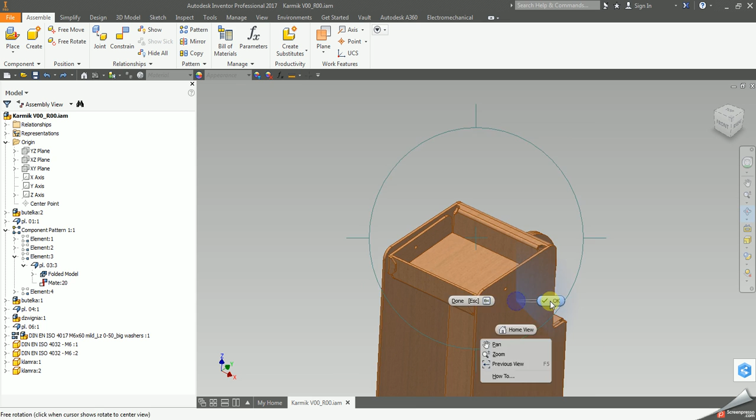Hi, it is me again, struggling with flexibility once again, and now I have made a few dozen tries to see what is working and what is not working, and generally it turned out nothing is working. And now I will make a presentation for you of how flexibility is not working in Inventor.

So we will try to place a pre-assembled bolt assembly here, and the bolt assembly is prepared as flexible so it can accommodate various thicknesses for the clamping or holding distance. So this is basically just an assembly of something that I am developing, and I will show you the bolt

assemblies. I have prepared 3 different types of the same bolt assembly according to various suggestions that arose during months or years of struggling with the flexibility issue in Inventor. So we have basically three sets of the bolt assembly. We have generally the same assembly, only it is built in a different way.

One is constrained to the origin planes and basically the origin coordinate system in its assembly. The other one is done so all components are free and are only constrained to each other, and the third one is built upon the first component being grounded at some point. It is the middle, the center of the assembly.

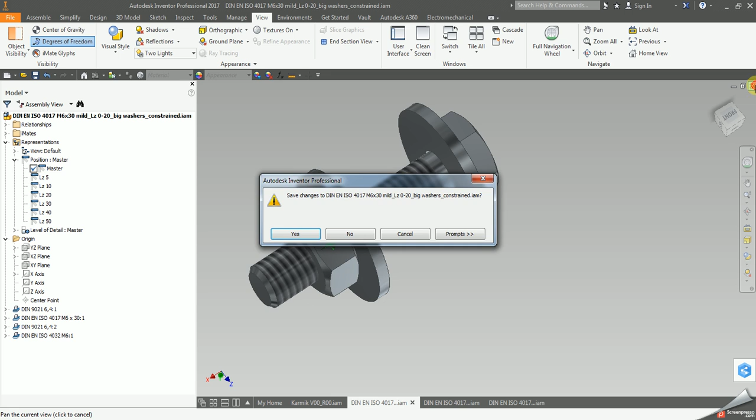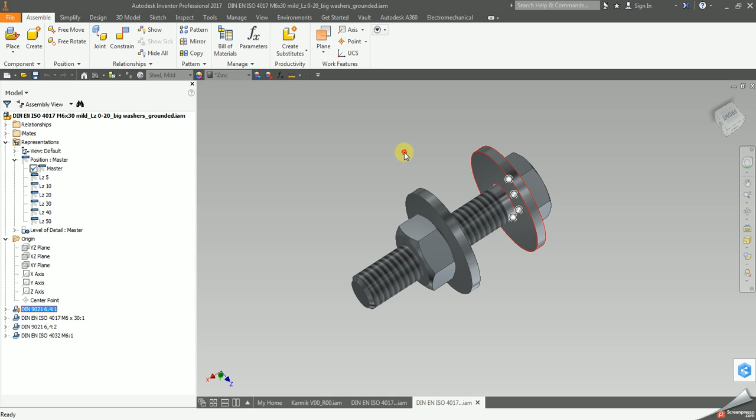The other assembly that we have is the assembly that is named as grounded, and basically this washer, instead of being constrained to the origin planes and the origin axis, is just grounded, because there was a suggestion sometime in the past that grounding the first component hugely increases the stability of calculating and solving the assembly.

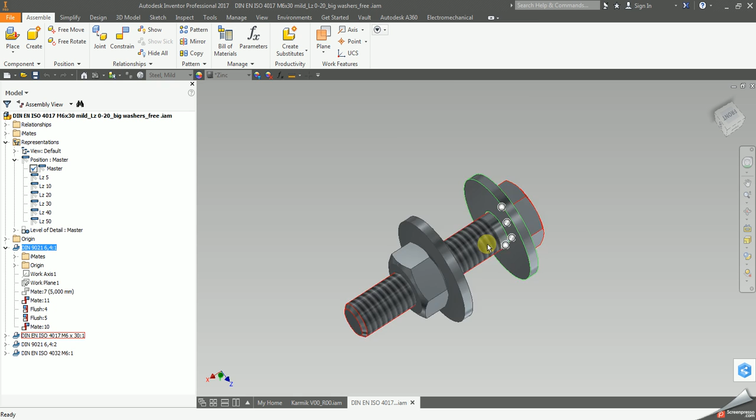And the third assembly is basically the same as the grounded one, only that this washer is ungrounded, so it is free to move, and basically all the components can move freely inside the assembly, and they are constrained to each other only. So now I will place all those 3 in turn in this assembly, and I will show you how Inventor is crashing the assembly in every possible case.

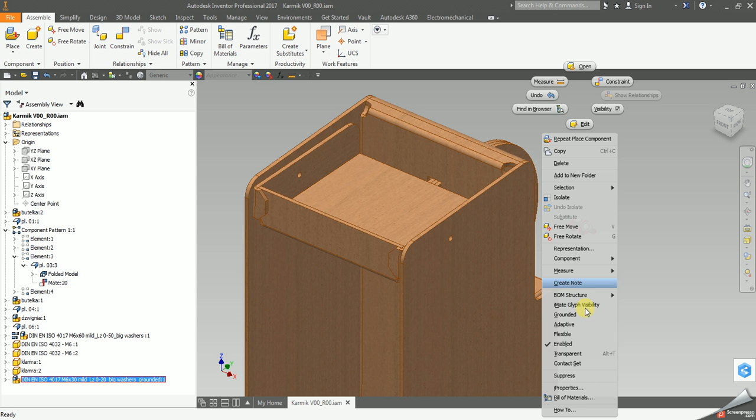So we shall start with the grounded, the most common one. I will place it here, and now I will make it flexible, and I will now constrain the axis of the bolt to the axis of the hole that I want the bolt to be in. So far so good.

Now the thing is, in this case, I want the bolt head and the washer under the bolt head, so the bolt head is outside. So I want to constrain the face of the washer to the face of the wall of this element. I will try to apply this constraint then.

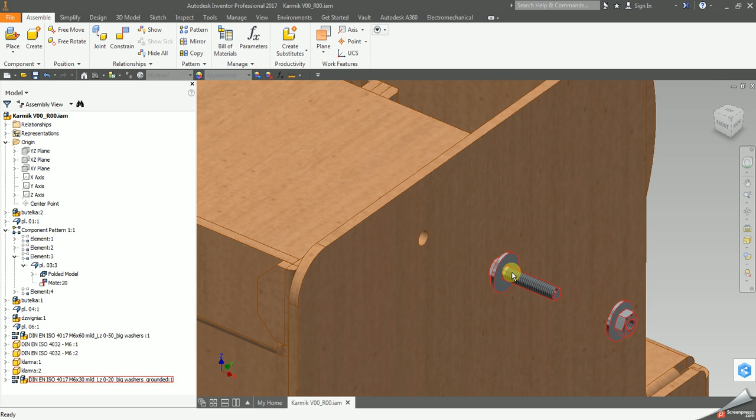This is fully doable, as this bolt can be in the other way, so it will fit. There is nothing that would prevent this bolt from fitting in the hole in this direction that I want. So I will try to apply the constraint.

It doesn't look very good because the bolt has now moved there for some unknown reason, but okay, I am giving it a shot, and basically we have a problem because the constraint solver did something that Design Doctor doesn't accept.

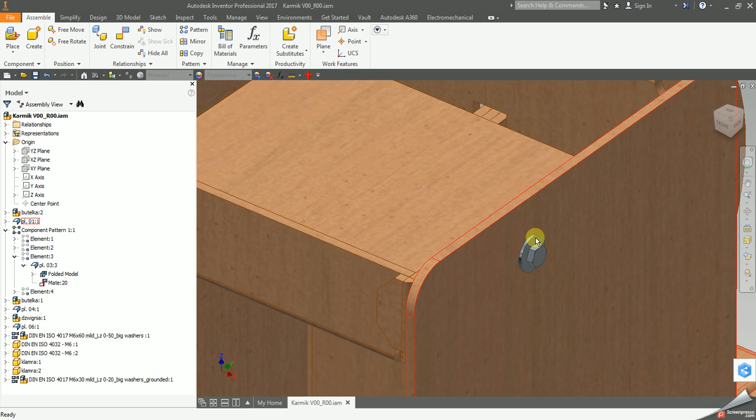Although the bolt looks fine and basically it is now here, we have an error. This error comes from some inconsistency in the way that the assembly is solved and the solution is evaluated. So there is some bug in the software that is preventing Inventor from solving this properly.

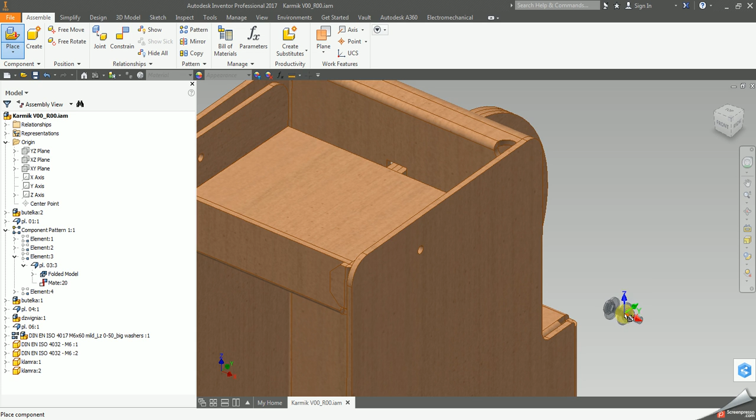We shall now try the same with the assembly that is not grounded but free. Johnson advised me to do the following: to unground the components inside the assembly, then to ground the assembly itself, and then to make it flexible. This way, these components can only move inside their parent assembly that is grounded.

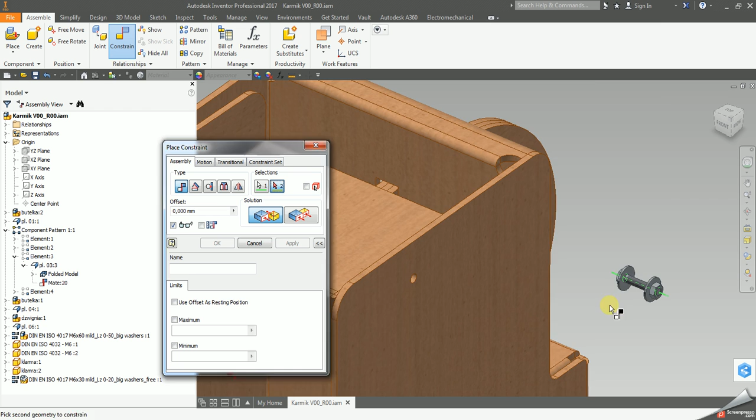I personally do not think this is the right solution because it prevents many solutions, and in many cases this cannot be used, but nevertheless I will try. So I will do the same. First I will constrain the axis of the bolt to the axis of the hole that I want the bolt in. So far so good.

Like previously, the bolt is aligned with the hole, and now we do the same. We try to mate the face of the wall with the face of the washer. The outcome now is very different from what it was before. As you can roll back in the video, once I selected the two faces for the mate constraint in case of the grounded bolt assembly, the bolt was immediately placed there for some unknown reason.

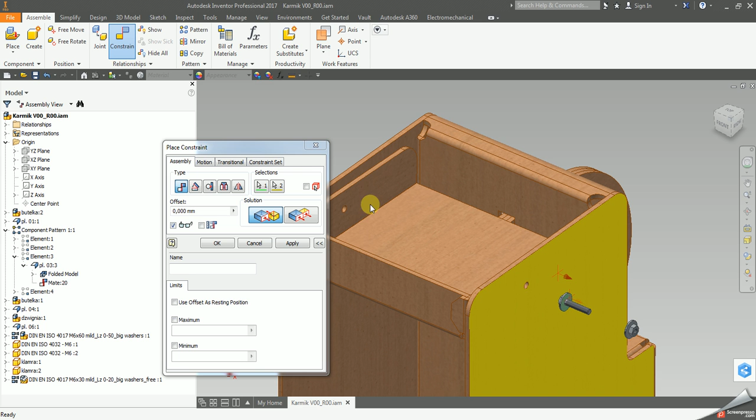Now it is here, and we get an error again. This time the bolt is nowhere near where it should be. We have an error, and basically the assembly is not usable anymore. In case you might say, oh, it is not a problem, just take the bolt.

No. In case of more complex assemblies where there are more flexible components, the assembly is forced into positions against its internal constraints, and it is no longer possible to rebuild the assembly properly. So it is lost. You need to delete all flexible components, and you need to rebuild the assembly from scratch. So this is not the point.

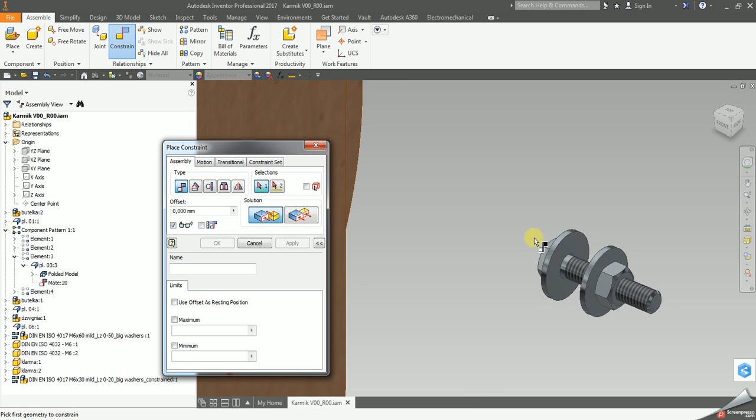So again, generally we have now the free flexible subassembly that also didn't work. We can try another thing, to place a constrained subassembly. So if I place the constrained flexible subassembly, I just make it flexible as any other component, and then again I will apply the mate constraint to the axis of the hole and the bolt, and then I will apply the mate constraint.

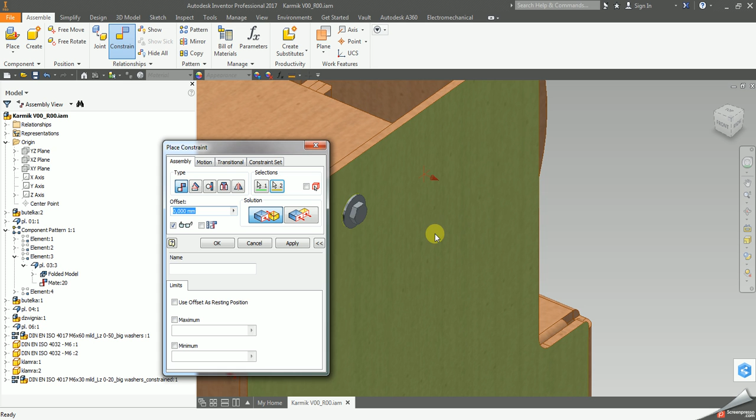I will try to apply the mate constraint between the face and the face of the washer, and generally the outcome is opposite. I will do that again. So once I select those two faces, the bolt is brought into the position it should be, not like in previous cases. In the first one the bolt was here, and in the other the bolt didn't move. So in this case the bolt is brought to the face of the hole, so it looks nice,

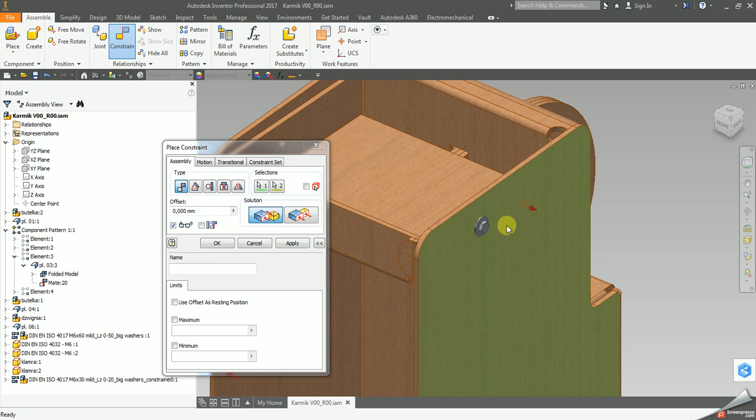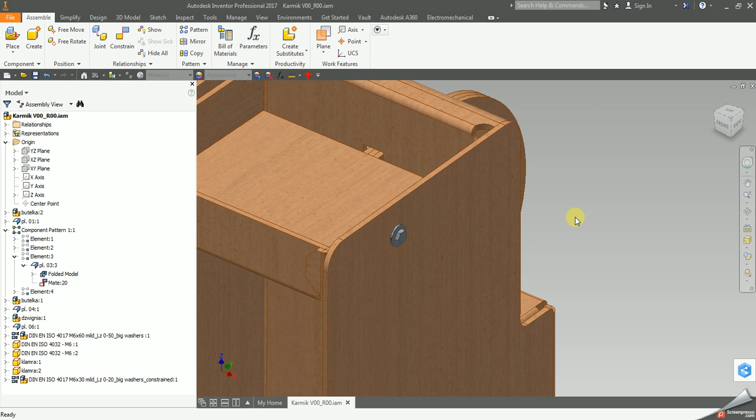it looks like it should be. Now I try to apply, and I am getting the same inconsistent relationship error. Only I have a solution that is valid. So again, some bug in the software that is somewhere in between solving and validating the solution for the assembly with the flexible components. Something is very

wrong here. So this is the most basic example you can have, and I have repeated it tens of times before I recorded this video. This is not working. Could someone from Autodesk please take this video, take this data set and try to find why it is not working. Once you have this fixed, the flexibility in Inventor will work. Why are you not willing to do that? Please answer me.